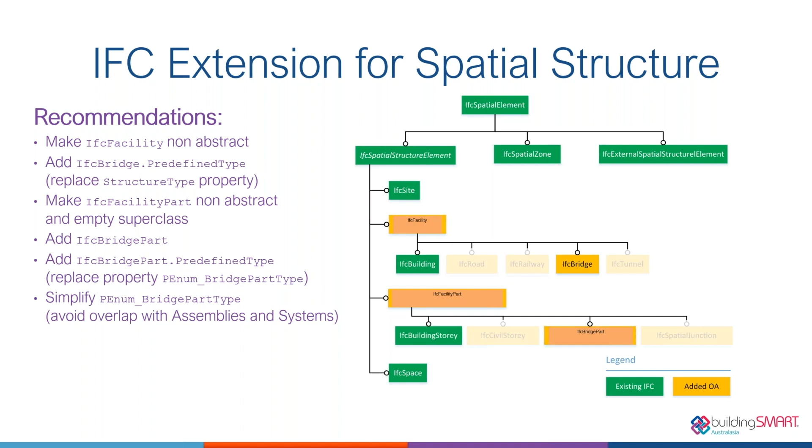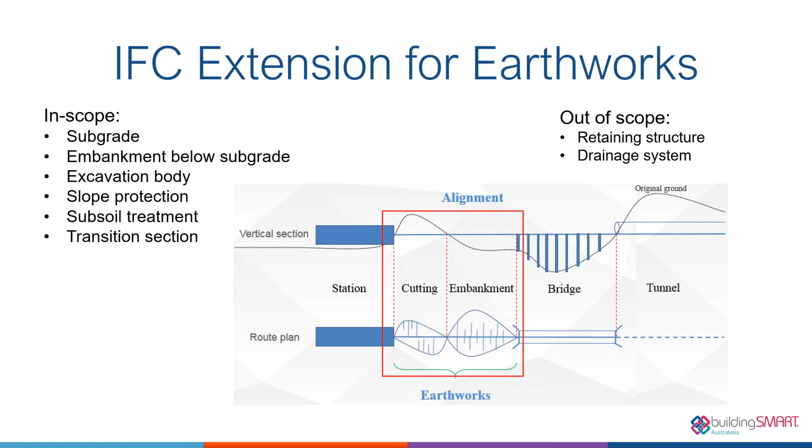So that's enough from me. My name's Ben Harland. I'm with Mott MacDonald, and also on the Transport for New South Wales Digital Engineering Panel. I had the pleasure of representing Australia's committee on the ISO 19650 work in Tokyo a few weeks ago, where we were mostly discussing parts 3 and 5 of this standard. So I'll give you a very quick update on what's going on there.

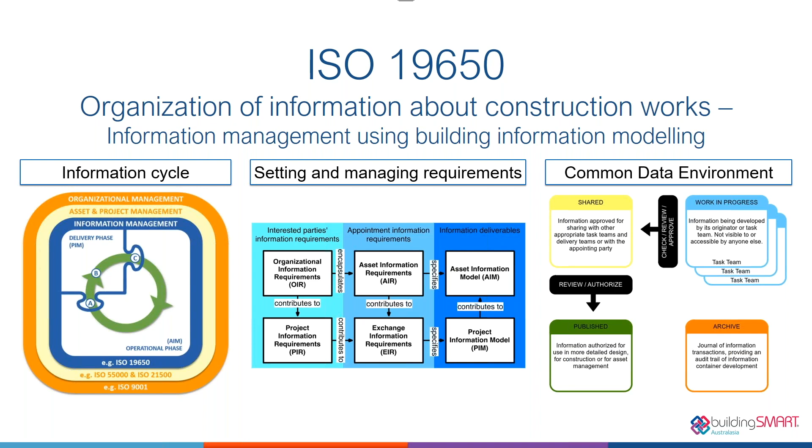So part 3, as I mentioned, is with regard to the operation phase, but it extends slightly into the beginning and end of the delivery phase. Here's a little flow diagram which describes how the whole standard works. First off, preparing to manage information associated with an asset - and it doesn't just talk about operating the asset, but also how to set appropriate requirements for the delivery phase, to make sure that at the end of the delivery phase the right information is being provided and integrated with the asset information model, which is the body of knowledge that the asset management team own and operate.

Just to break that standard down to 5 basic elements - and this is looking at it slightly from a delivery phase point of view, which is my guess what the majority of people on this call are coming from - first off, planning for the procurement of an asset and a digital twin, or a useful body of information which describes and helps to maintain the asset.

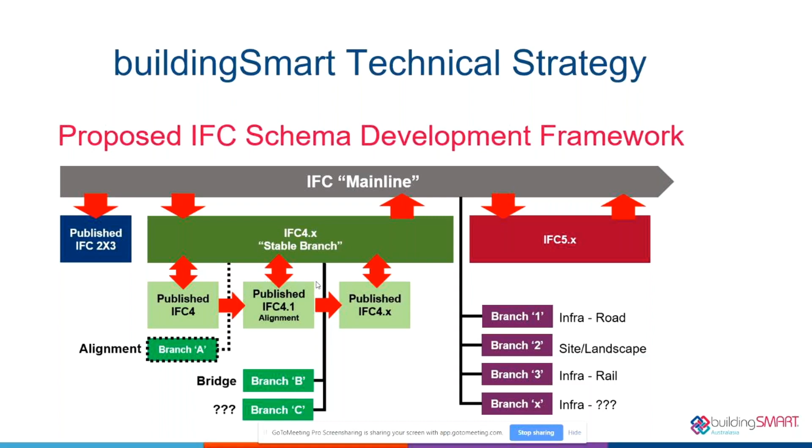That's all I quickly wanted to say. If you want any more details about any of these aspects, I'll flick back up so you get my email address if you want to query anything further.

I'm a member of the Building Room Steering Committee. The Building Room was one of the first rooms of interest created in buildingSMART, along with technical, and its original role was representing the interest of users who were modelling buildings. That role has become much more diverse, and I'm going to talk about three projects I've had involvement in—for the third one, but the other two I'm just broadcasting what these two projects have been doing at the moment.

The lead of the LOX project has been James Vandezande from HOK in the US, supported by Nick Nisbet. They came together because the LOX terminology has many variants.

There's LOD—was it detail or development? Was it geometry? Was it information? Did it represent accuracy or coordination? Or was it something that was finally suitable?

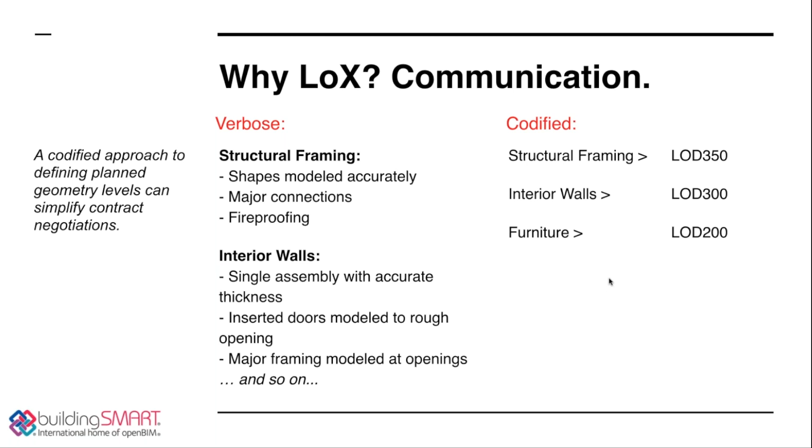The BIM Forum in the US has led a lot of this work with its publications, and the dictionary has helped this stuff.

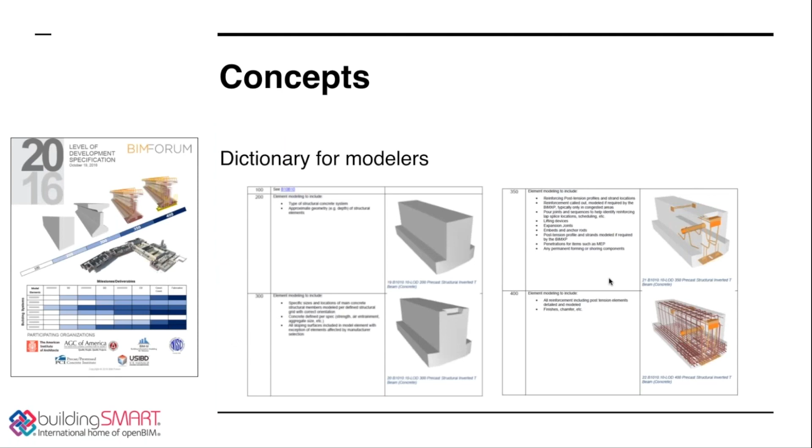Is LOD development something like this? Again, how's this all resolved? And finally, validating LOD. How do you validate completeness or accuracy?

James leant towards the UK suitability code, but they're anxious now to get some final response on this topic. There's a report that's available, and in fact, after this session, we should give you a link to the Tokyo Summit repository of all the presentations, and you can explore all of this material in much more detail.

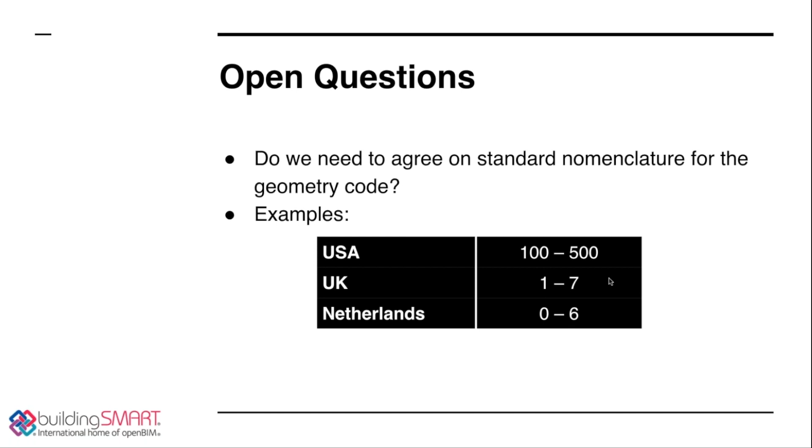Open questions: have we got the same coding that applies here in Australia? Are all of our client groups using the same terminology for the ways that they structure projects? Of course, most clients are not highly articulate in this area, but it's something that we have to focus on.

The second element of my presentation is the work called IFC for Site, Landscape and Urban Design. Jeffrey Ouellette, who was a former chair of the Implementers Support Group and was employed by Vectorworks in the UK and the US, is now the leader of this project and is working directly for buildingSMART International. The project has been approved in the Standards Committee, so it's part of the process management of buildingSMART International. And you will recall from Jim's opening statement that the Geotechnical project has a close relationship with this proposed project.

What are the goals? Well, I think it's a very natural extension of the fact that if we have a building model, we're placing that building model on something, the terrain or the ground. The model setup project looks at how the legal boundary of your property works with the building model, and this takes the whole terrain and site context to a much broader and stronger representation.

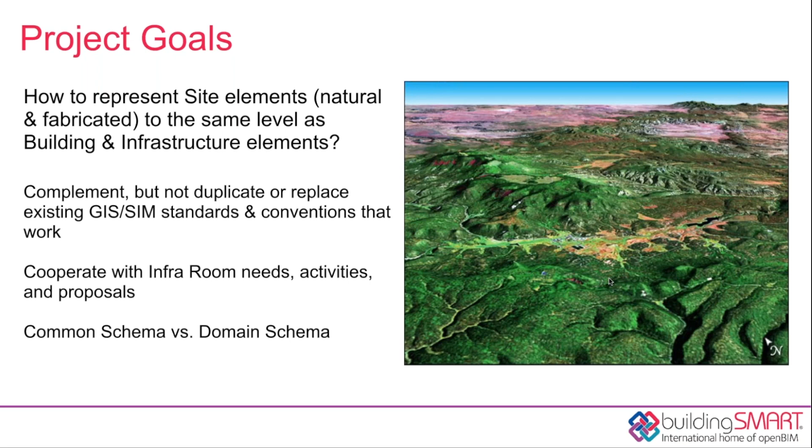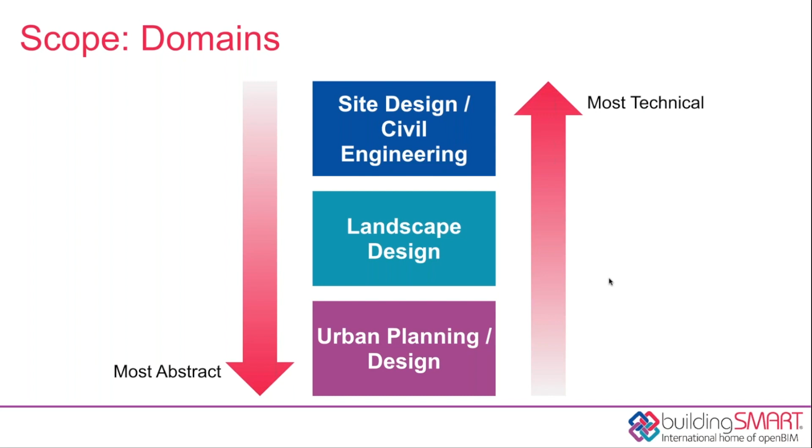It overlaps several areas. Urban planning is only emerging. You probably know that Jim Plume and I and David Marchant have been working on precinct modelling, and at the precinct scale of where we're modelling, this topic is a very important element because it's a big gap in the IFC schema.

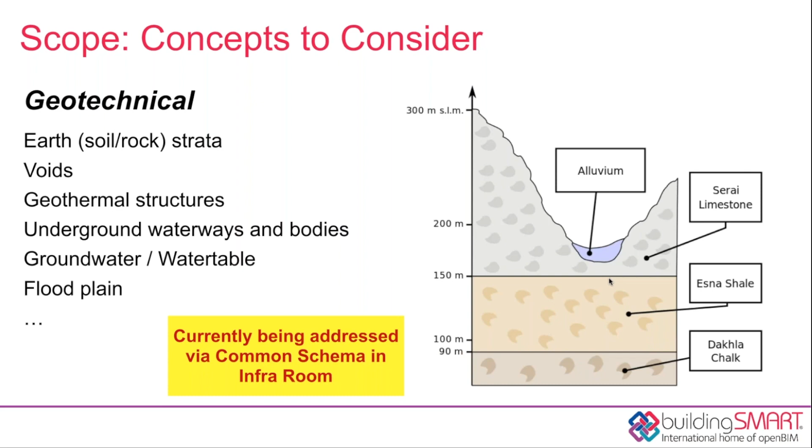So here's the geological representation. Geotechnical, how does all this represent? Why do we have to go to multiple government agencies to acquire this data and then find that it's not in a format that we can even use anyway? I think this is a very important topic, particularly in the actual landscape pure domain.

Norway has done a preliminary proposal for a landscape extension, so there's a lot of work there. And the British Landscape for BIM working group have also done quite a bit of work on standardising specifications and representations of certain shrubs and bushes and stuff like that.

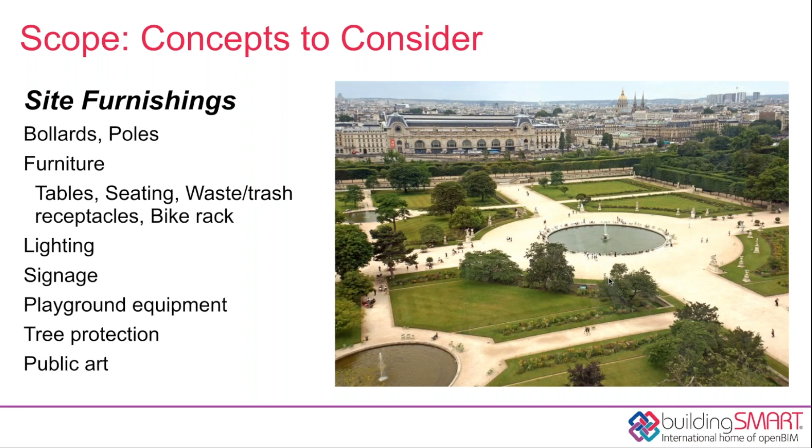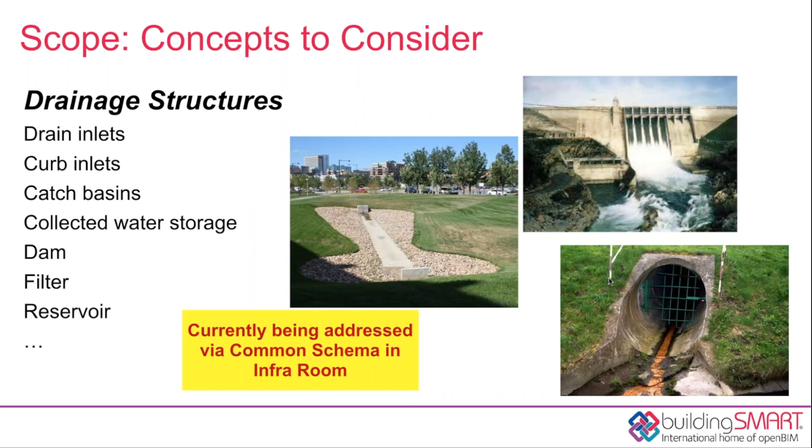The external artefacts, all of the hard furniture and stuff like that, pavement, have to be covered. And we also need to understand how we integrate drainage, stormwater, all these things. Finally, probably many of you know that AS 5488 has been looking at underground services, so that has a very strong relationship to this work.

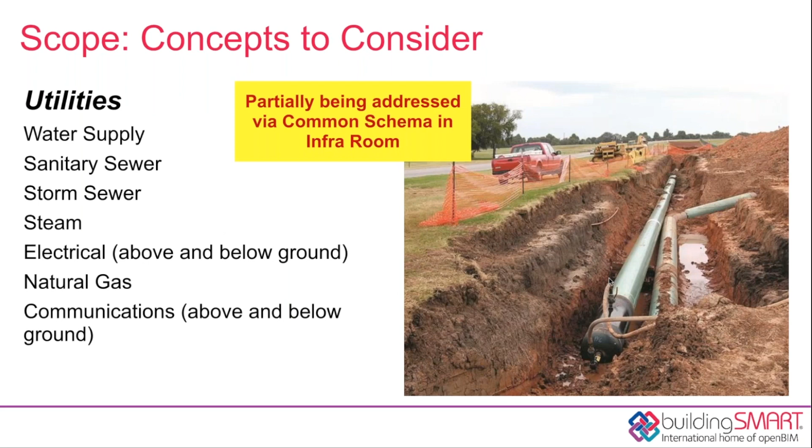What's one of the biggest costs to the New South Wales government? Underground services on the Sydney Light Rail.

The final project I'll talk about is the model setout. I think many of you have probably been to presentations on it at Built and some of our own local workshops. I'm going to just show you the latest bit of work we've done on a demo.

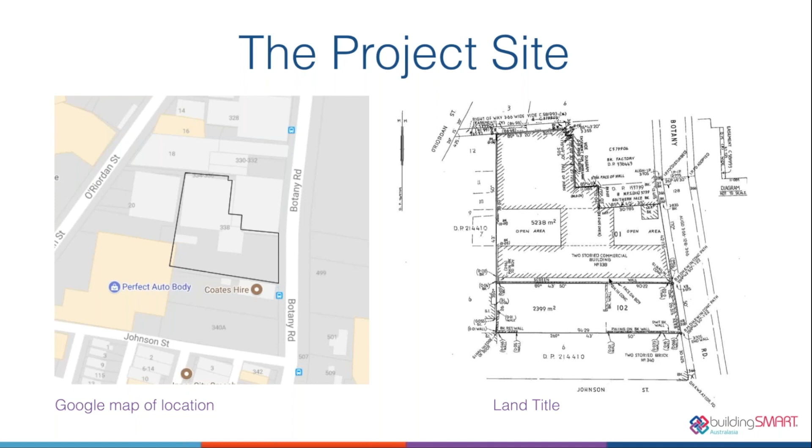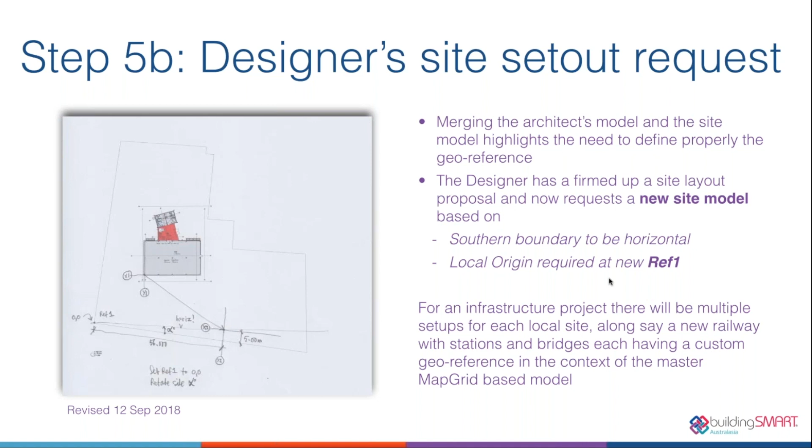So here's a little site. We want to build on this site. The architect has worked out that he wants to put his building in the building orientation, so he wants to rotate the site. The important thing is that when we come from a map reference, we need to have a strong relationship, which is defined by a Helmert 2D transformation.

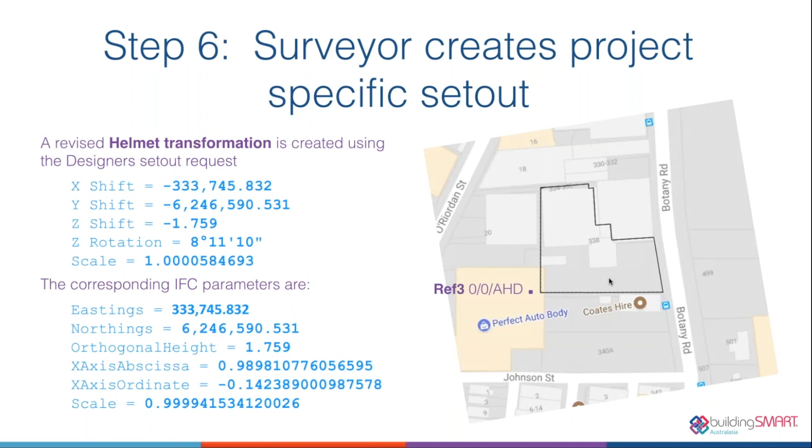The surveyor sends a new site model to us. This time it's in the right orientation and in the right location. The architect then plays with it and adds his data.

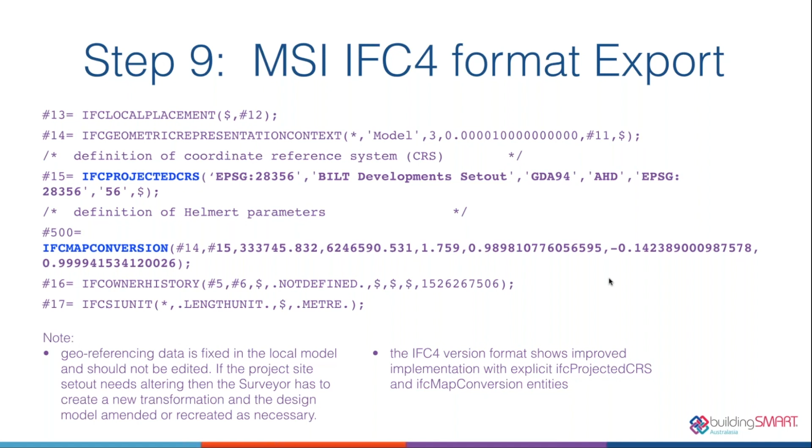Here is the IFC4 implementation of the data required. Only two entities, and the IFC map conversion holds the helmert projection transformation data. So it's a tiny implementation for vendors, but we're not seeing a massive development of that yet.

So here's our little test. We've got back the new data and we're able to put it on the site. And this is no fake. This has been done using the proper process, and it shows how we can really get much better accuracy and reliability of the data.

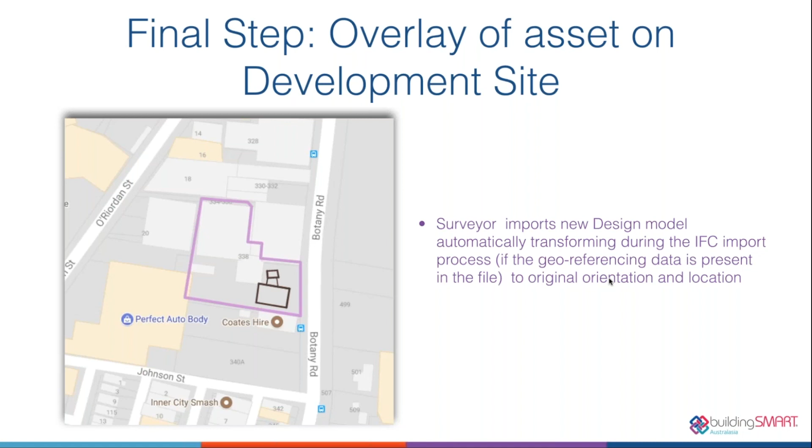Of course, for a single building, this is not so much an important problem, but for infrastructure, it is a particularly big deal. If we were building a station on a railway line, you would use this technique to get your local site model of the station, which will be perfectly integrated when it goes back into MapGrid in the master model held by the infrastructure designers.

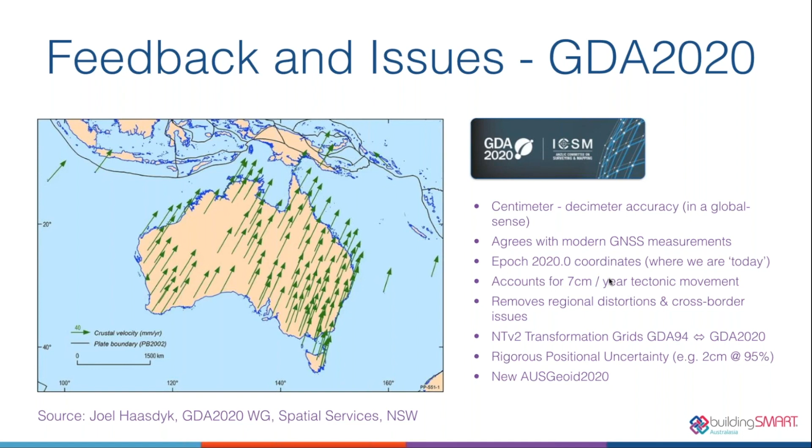We've had the good fortune to have some strong feedback from New South Wales Government. They have a project going called GDA 2020. Australia has a new geographic datum, which will be established in 2020. Since GDA 94, we've moved 1.8 metres northeast, as the green arrows show.

More importantly, I think, probably for us in the future, the accuracy of the systems today is just so much better. With this new technology proposed in GDA 2020, you'll be able to track a mobile phone in the hands of a person. So spatial location from sensors, from other devices, from tracking people and vehicles and goods will be significantly enhanced.

On the project itself, we responded to a paper by a Swedish group, and our key supporters have just delivered their feedback. We've got to take it forward into the international context. We've had very strong support from Germany. Stefan Markiĉ was a presenter at the Tokyo Summit.

How am I going on time?

We were lucky that I was asked to present at the final plenary of the buildingSMART Summit in Tokyo on this topic. So I put the whole MSI project from beginning to end.

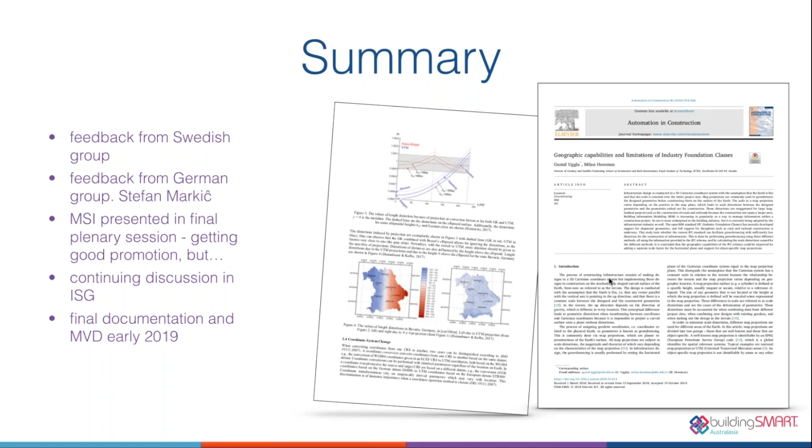So that's me. Thank you.

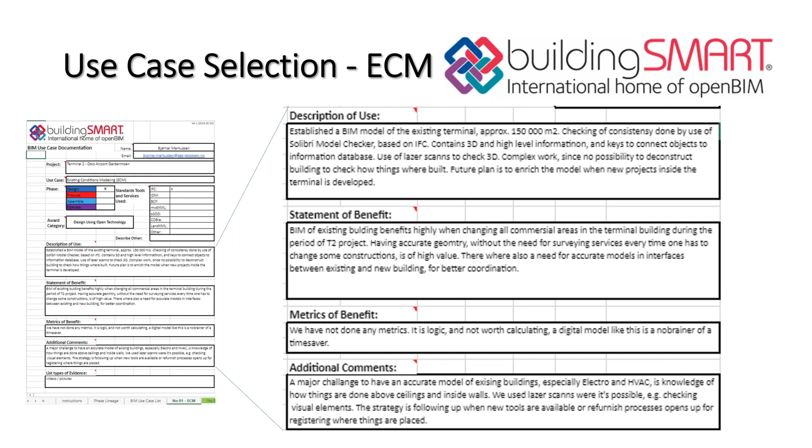Next one, Jim. And then the jurors take over on stage 2, where we look at the evidence that's been submitted and posted with that stage 1 form. We do two things: we are judging firstly on the stage 1 claim, and then whether they actually followed up with the evidence during stage 2.

Having done that, which took us this year about 2 months to get through, we then went into a consensus process where we selected probably the top 6 in each area, and then discussed which ones we thought as a group should be declared the winners, or at least the honourable mentions. Next one, Jim.

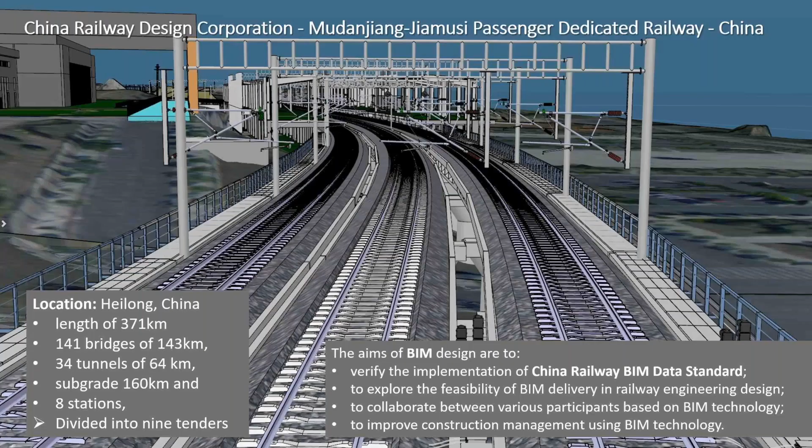Now, I made a little change to my presentation while we're sitting here online. Right now, this frame here was going to say thank you and be the end. So I might get Jim to go right down to the bottom, because what's here is a group of slides that are showing. If we've got time, we can skip through them very quickly if you want, Jim.

The following few pages are the winners. Do I need to keep going?

Doesn't matter, you'll get the presentation when it's posted, and on the last page there's just a couple of links there, keep going way down. Oops, oh missed it, there we go.

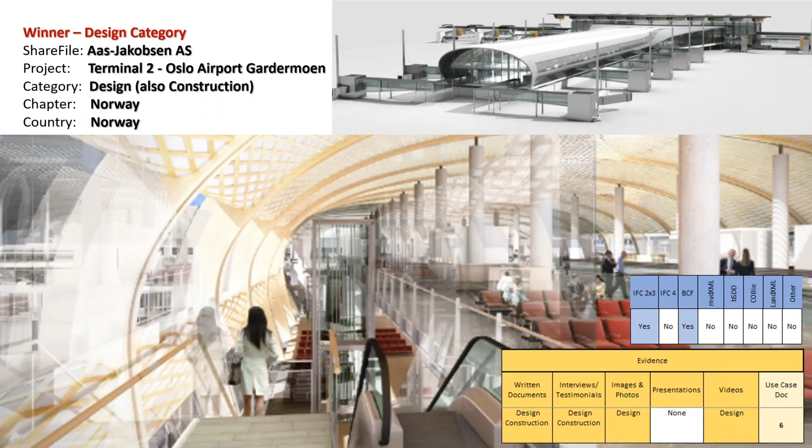So those links there are firstly to the buildingSMART awards page on the buildingSMART international website, and also a direct link for that as well if you want to. I also had my email on there, which doesn't really matter, but if you want, you can get in touch with me through Aaron and know more about the awards process.

But definitely, if you can get a chance, grab hold of this presentation and have a quick look at the projects that were submitted and how they rate. But also, buildingSMART is going to issue case studies on the winners, and hopefully some of the honourable mentions, which will be published in due course as well, and they'll have a lot more detail. Obviously, they have to negotiate that with the submitters themselves.

So thank you for your time. That's it for me.

I have a question for Phil. It's Ben Harland here. Phil, was there any, were the metrics gathered, and could they be shared, the measures of success from the projects? It will come out in use cases, I suspect.

I can actually make that inquiry and see if they can be shared, but not all of the metrics were provided, and a lot of people didn't have metrics at all. Obviously, it's very difficult to measure certain use cases across the project, and some of the projects weren't actually complete, so they may have been presenting a design phase of a project that was only just going into construction, and some of them also...